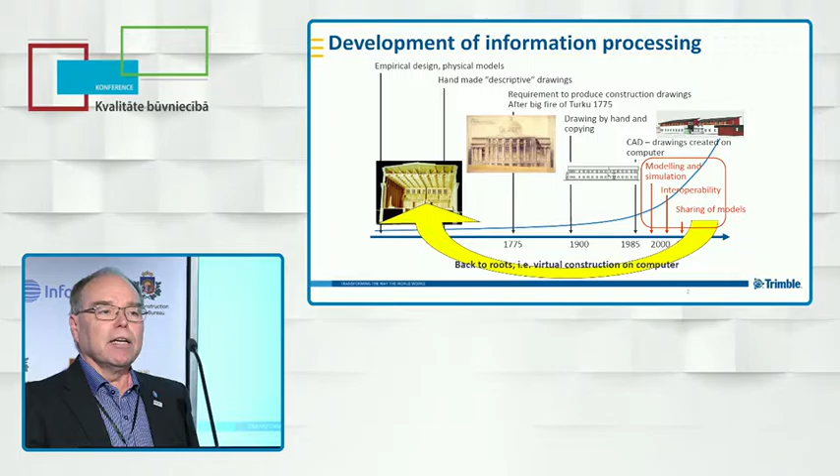If we look, we have been making buildings for about 10,000 years. And we only have a few milestones in how information has been handled, how information handling has changed in the construction industry. So originally, it was mostly empirical, making some physical models.

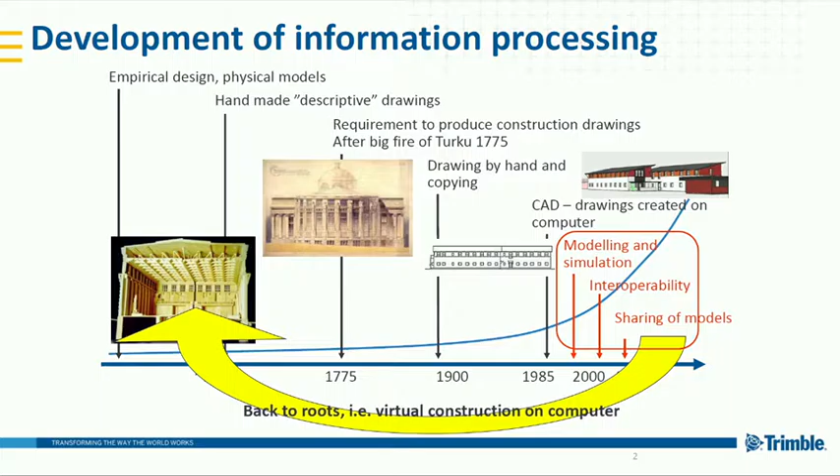Then came hand-drawn painting type of drawings, which were drawn manually, so they were not possible to distribute. And the first big milestone was the invention of the blueprint machine about 100 years ago, when we started to get these documents and drawings which could be proliferated throughout the project and everybody could access them and have them.

And since then, we haven't had a big change, because CAD was not a big change when CAD came. CAD only changed how we produce the information, but it did nothing to how we consume the information, how we use the information.

So we still use the information in the same way that we have been using in the last 100 years, mostly. And that's now being changed by BIM, because with BIM we are going back to building virtually, building models. So now we are on the verge of the next big change from the blueprint machine.

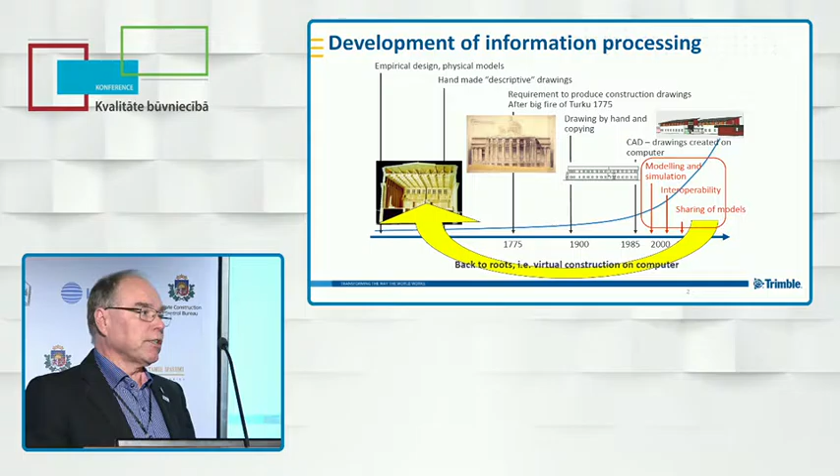So as I'm the BIM ambassador, so I get to tell you what BIM is. We have, firstly, there is no real consensus of what BIM is. So every person has his own perception and own impression of what BIM is.

And most people think that it's BIM software. If you use some piece of software, you are doing BIM. And others that you often hear say it's process, model, populated database, and others. But my favorite is that BIM is a technology, nothing more, nothing less. It is one technology that we will use in the construction industry.

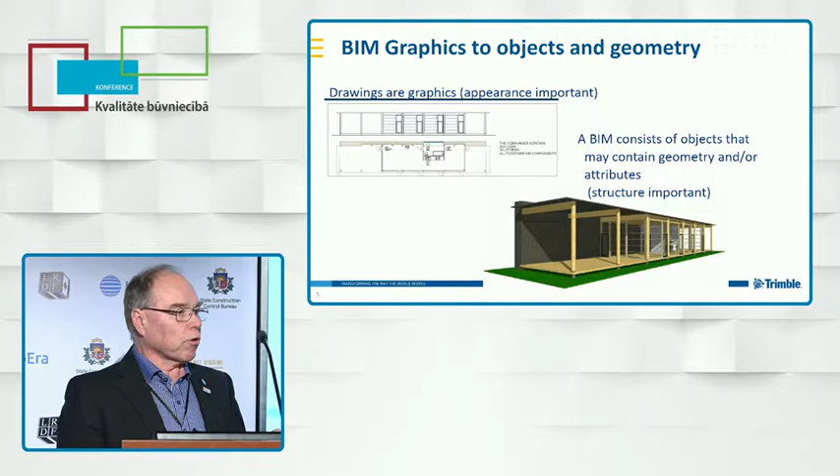And what technology is BIM then? I have a very pragmatic and practical view on BIM. To me, the gist, the core of BIM, is that we go from human-readable documents to machine-readable data.

And I'm very happy that Rainer talked about machine-readable data here earlier, because usually I'm the lonely wolf talking about machine-readable data, but that's very important. That's what's going to make the big change.

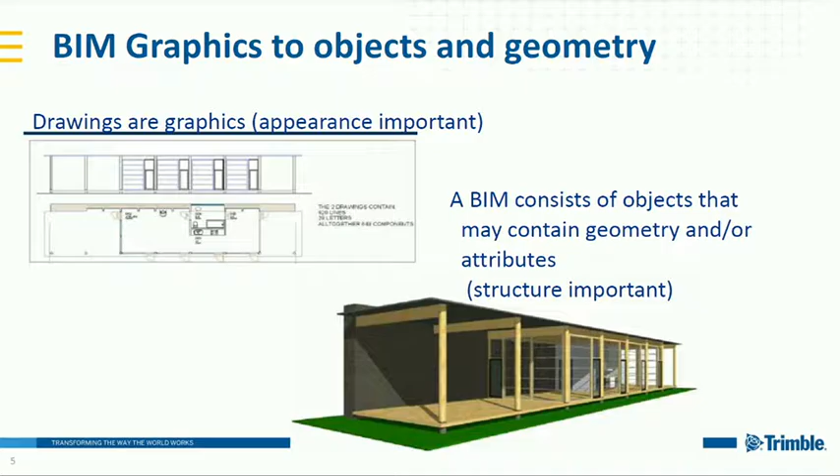Because with documents, however we produce them, drawing by hand, blueprint, on the screen documents, it's still all human-readable. So a human always has to read the document and act upon it. Whereas machine-readable data, we can feed directly to software, and the software can understand it and act upon it spontaneously and automatically.

So my executive summary of BIM is automating reception and consumption of data, which has been the same for 100 years. And that's a big deal, because that means that we can really use software when we consume the information.

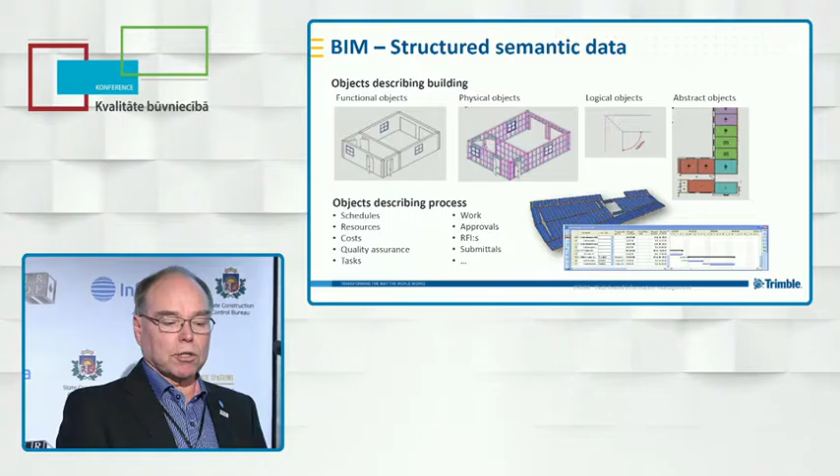What we do is go from documents, which is just spaghetti data, human readable, to semantic structured data, as it's called. So we have an agreed structure for the data. We have objects where we model, and we have overlapping objects: architectural objects, physical objects, constraints, and abstract objects, and also objects that define the process, how we are going to build. So in BIM, we use the objects modeling structure for information.

A few words about OpenBIM. What does OpenBIM mean? It means that the data is not tied to any specific tool, software, or vendor. In practice, that means we use open standard data formats which are accessible to everybody. Everybody can use them. IFC has been mentioned here a few times.

That's definitely the most important structure in construction. But we also have CityGML, which is more for city level development, KML, and other standards. We use those to communicate between the different parties and processes in the construction industry.

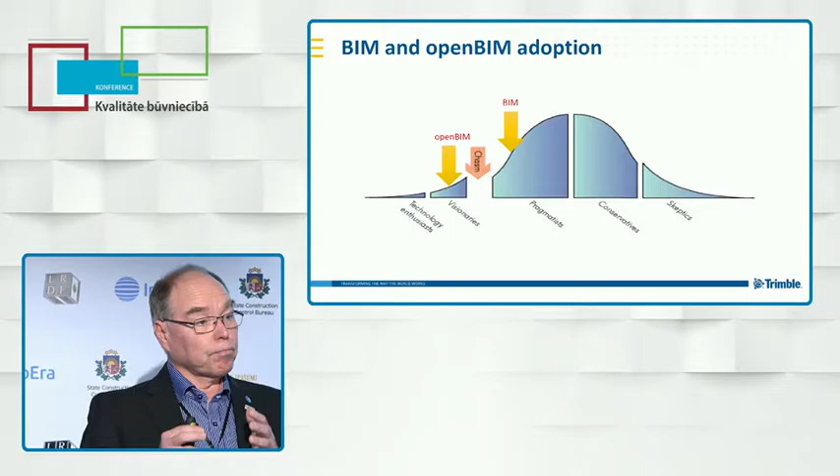Then if we look a bit at BIM adoption, how it's really used. If we look at this, I call this legacy BIM, traditional BIM: we create models, we create the semantic data, but we use it to produce documents, and we communicate with those documents. That's legacy BIM, and that's beyond this technology chasm in every market, I would say. There is no going back to just drawings.

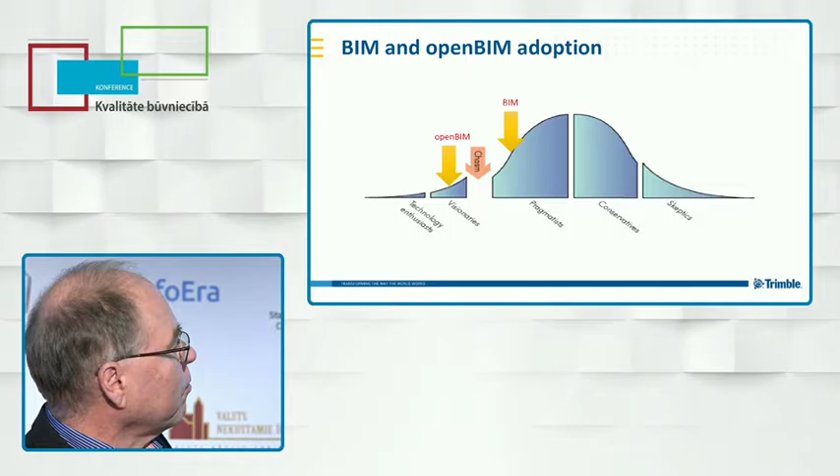But then if we look at OpenBIM, where we actually give out the semantic data to the other parties in the construction industry, that's still clearly ahead of the chasm. My job is to gather the momentum so that we can jump over this chasm to make it an everyday practice to share and use the semantic data in the process.

And why do we need this semantic data then? The construction industry has been really bad at using information technology and technology in general. You have probably all seen these curves about construction industry productivity. Every other industry has gone up 100%, and construction industry down.

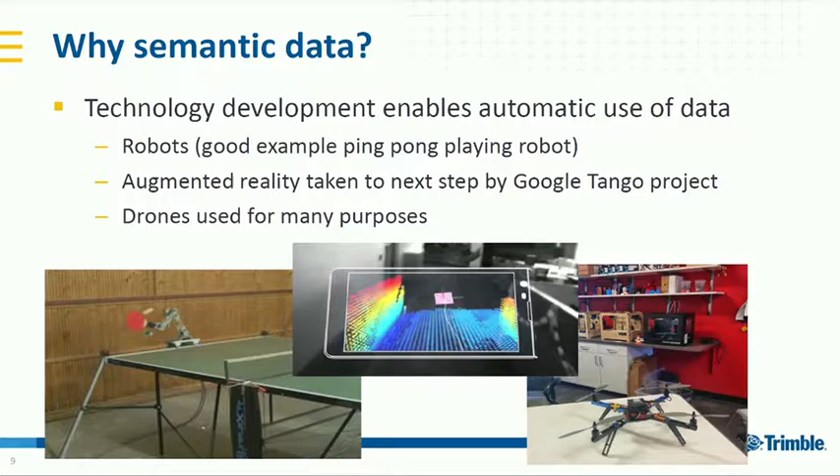The reason is that the construction industry has not used technology and IT to its potential. And the reason for that is that the construction industry is so fragmented. There is no process owner who can mandate that in this project we use these technologies. Nobody has that power in a construction project because there is no owner of the whole project. The owner changes many times during the project, and that has led to this situation.

But OpenBIM promises to be the solution to this, because we are not tied to any specific tool or technology. We can use whatever we like, as long as we use those open standards which can be used by everybody.

My prediction is that the killer app for semantic data, for having real structured data, will be augmented reality. But there are other uses as well - you can use it directly to control machinery, robots, whatever. But it's very clear that having these touch devices is just an intermediate step.

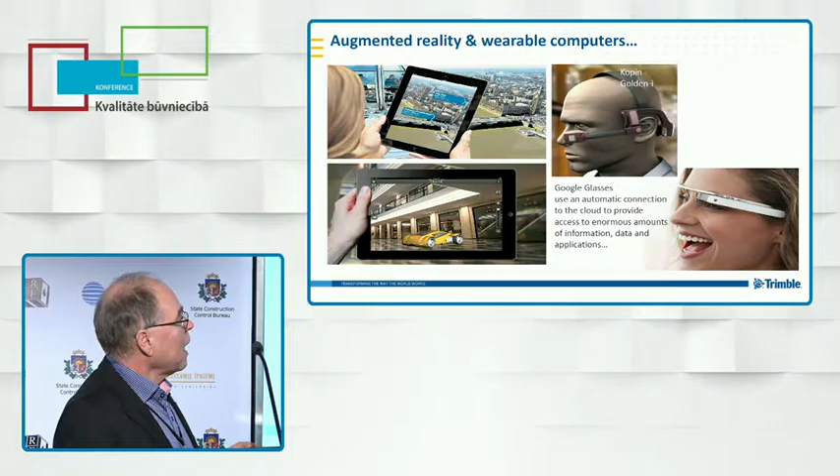In the future, we will be using wearables. Especially in construction, it's quite easy because we have helmets anyway, so embedding the technology in the helmet is going to be very easy. That's my prediction, that this will drive the change.

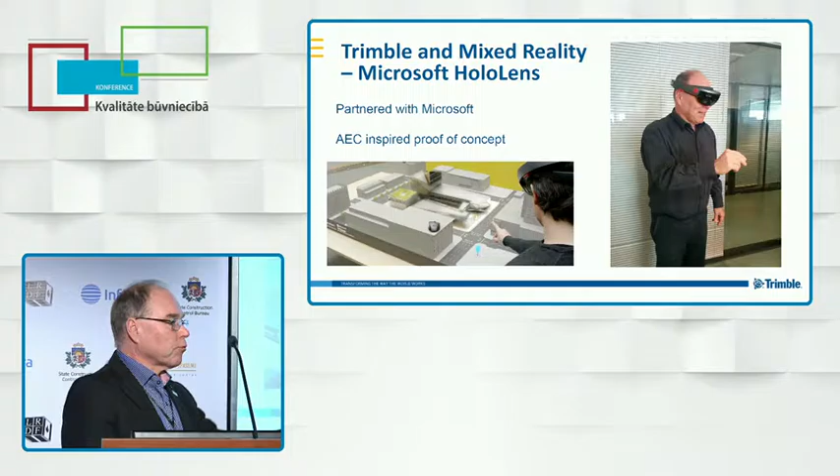Trimble has been very active in this field, so we have been together with Microsoft developing this HoloLens. I heard an explanation of this, that it's outrageously amazing. And having tried it - this is me trying it on - I would agree, this is amazingly incredible what you can do with this, when you combine the real world and virtual world, and that's why it's called mixed reality.

Then, of course, robots are coming. That's a very important use for the semantic data. Of course, we are very strong in steel, with the whole Tekla, coming from Trimble.

I'm from the Tekla part of Trimble.

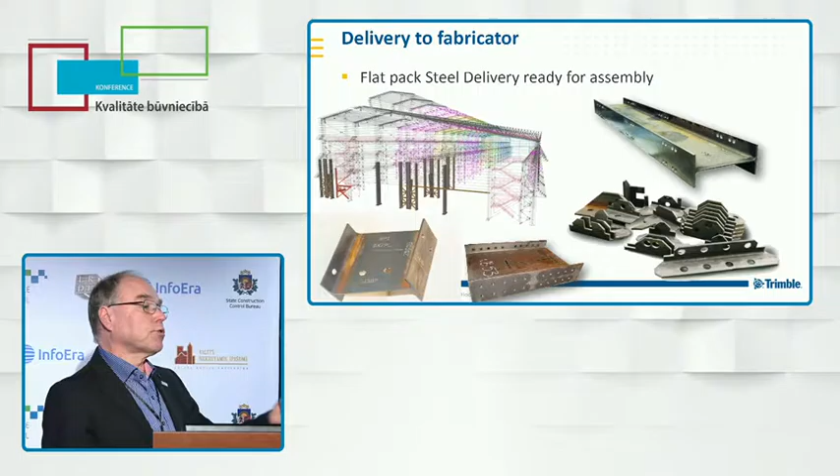So this is where we are today in steel. We can deliver flat pack steel delivery almost automatically. We get the information from the model, control the machinery at the shop floor, which makes all of these parts more or less automatically without human intervention. In a big factory making tens of thousands of tons of steel a year, you might have 2 or 3 workers in the factory - it can be almost totally automatic. The workers are just controlling the machinery and they produce this.

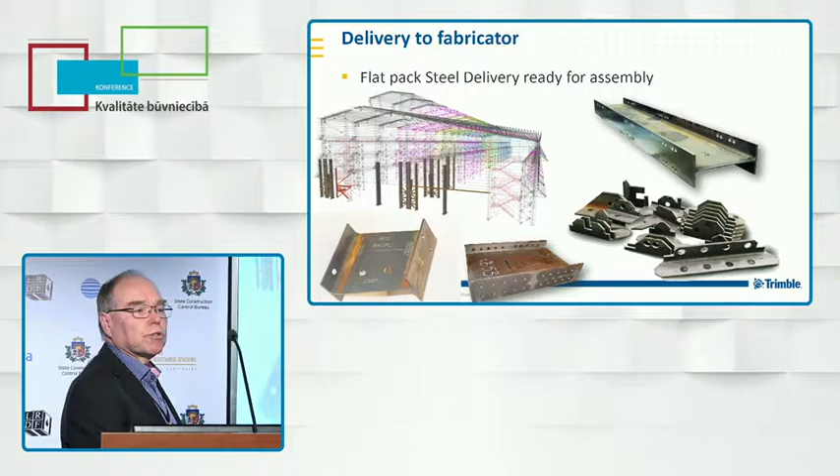But today still, when we go to the assembly, when we weld those together and make the actual steel parts and steel structures, that's mostly manual work. So that factory would have 300 people in the section of the factory doing the assembly.

But that's about to change, because now the next step is that we will also automate the welding and the assembly of the structures using robots. And this is a very interesting picture in itself, because this predicts the future, that everything is becoming commoditized.

Traditionally, the steel machinery which makes the parts is very special purpose machinery made by special companies - very complex, expensive machinery. But that's about to change, because now you can, for cheap money, buy a standard industrial robot, bolt it onto some kind of pedestal like this, and then you write software.

So this is one part of the general development, that everything is becoming software. The hardware is totally, you can buy a processor for a few dollars which does almost the work of the most expensive, so everything is leveling out in the hardware. On the machinery and mechanical sides, that's industrial robots, which are very precise, very durable, very reliable today, and the only thing to control them and use them heavily in construction is writing software.

And that's going to also change the prefabrication, because these machines are much cheaper than the previous generation of machines. They are also smaller, so they can be put on site. So you don't only have off-site prefabrication, you can also have on-site prefabrication, which can in some cases be much more beneficial than transporting - like making big rebar cages.

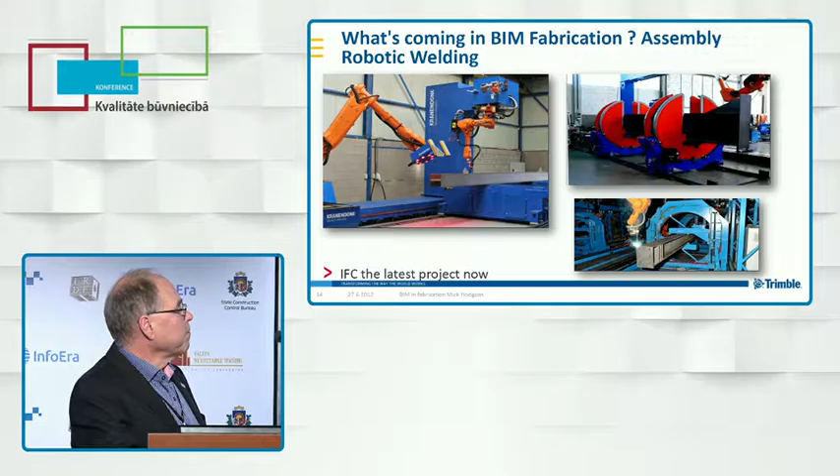That's also a promise of BIM, of course. To do this, to do the automation, you need to design the building fully. And that hasn't been the case. Traditionally, you have had only GA drawings and type details, so you haven't solved the detail at every instance. With BIM, you can do so now, and you have to be able to use these.

But BIM also gives you the productivity in the design stage, that you can actually fully design a building down to the last detail, which means that you can prefabricate and use technology. That's a prerequisite also, apart from the information, that kind of design, and that leads to some changes in competence, because competencies which you today have only at the site, you will need to have in the design and planning phase also of the construction.

So BIM is going to bring about quite fundamental changes, but we are still very early - these are very early days still. It's going to change. And also the focus in BIM is changing to the consumption of information. So software dealing with consumption, how we use the information, is going to be the bulk of software developed for BIM in the future. So this is my message.